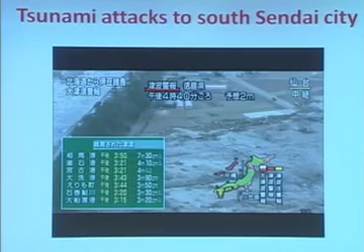Big ships also went onto the land. Very difficult to bring back to sea. This is very heavy when there is no water.

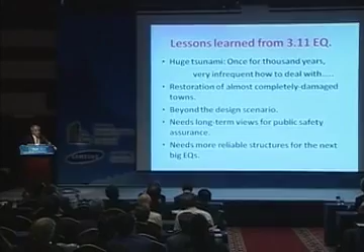Lessons learned from the March 11 earthquake: a huge tsunami occurring once for 1,000 years, very infrequent, how to deal with. Restoration of almost completely damaged towns - there are 500 towns that were damaged. Beyond the design scenario, we need to consider long-term views for public safety assurance, and need more reliable structures for the next big earthquake.

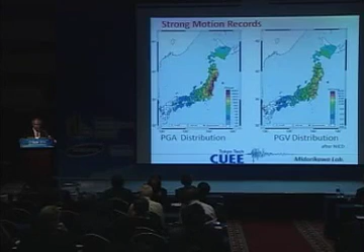Not only earthquake, but also strong wind we have to consider when we want to build very tall buildings in the world. On the left-hand side, peak ground acceleration distribution - maximum acceleration is 2.7 g. The maximum peak ground velocity displacement distribution, maximum is 3 meters per second. There are many earthquake records in these 20 years. Northridge earthquake, 17 years ago, top left.

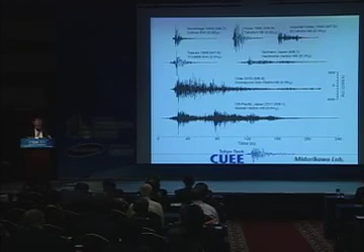The response spectrum I showed in Sendai - almost this level is once in 500 years response. But more than 1 second, not so strong. The less than 1 second period is a little big, so many buildings could survive. If the spectrum over 1 second until 3 or 4 seconds is like a peak of 1 second, I think many buildings would have collapsed.

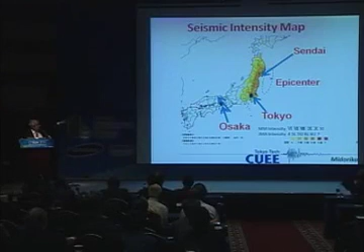I'd like to discuss 3 cities. Sendai is very close to the epicenter. Next, I would like to discuss several buildings around Tokyo. Finally, I'd like to show one building in Osaka. From Osaka to the epicenter, I think it's 800 to 1,000 kilometers distance.

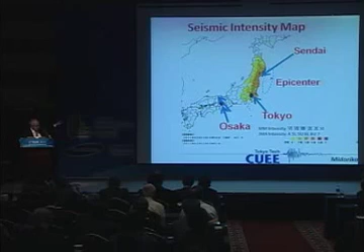This is Sendai city after the earthquake. I think you cannot see any damage. But we found permanent displacement in an apartment building. This is 14-story, not a tall building, but the residual permanent displacement is quite large. No one wants to live in this building after the earthquake.

They will demolish this building. I think you cannot understand why, but the permanent displacement - they don't want to live there after the earthquake. You can see the damage is not to structural members, but there is permanent displacement.

And about these 30 years, Japanese contractors, researchers and designers made retrofits to old buildings. This building was retrofitted before the earthquake, so this is okay, no damage.

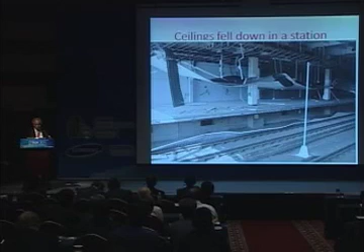This is a ceiling that fell down at the Sendai Shinkansen station, but no one was hurt. This earthquake was very long.

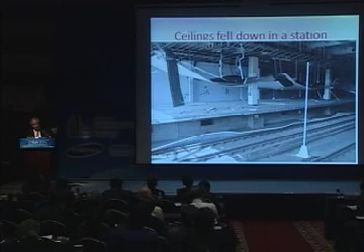They left from the dangerous ceiling, so it is okay. But more than 1,000, very many ceilings fell down due to the earthquake motion.

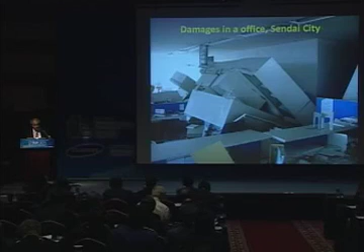And I would like to explain the behavior of tall buildings in downtown Tokyo. 35 million people live in the Tokyo metropolitan area, but we will have a big earthquake in the next 30 years.

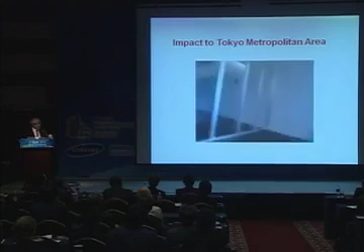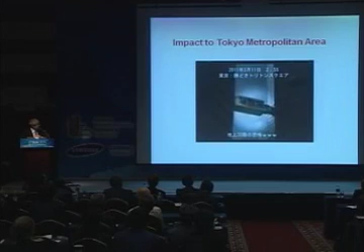This is a video inside a tall building. This is about a 40-story building, two 40-story buildings connected by a damper. I think you can see the movement of the connection.

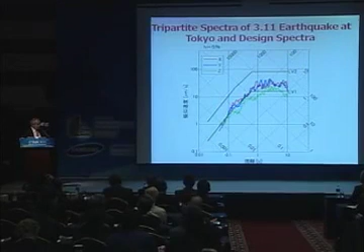We have two levels when we design tall buildings and ordinary buildings, level 1 and level 2. Level 1 is a return period of about 20 years. Level 2, we consider a 500 year return period. This tripartite response spectrum is between level 1 and level 2. Level 2 is 5 times bigger than level 1.

And we expect in design the level 2 earthquake. This level 2 is 3 times stronger than the March 11 earthquake.

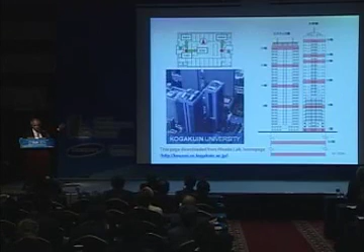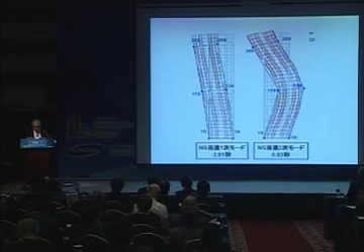This is Kogakuin University, but there is no damper and no seismic isolation. About a 30-story building. On the left-hand side, the first natural period and mode. On the right-hand side, the second mode and second natural period, 0.93 seconds. And from left to right, over 400 seconds, but vibration did not stop.

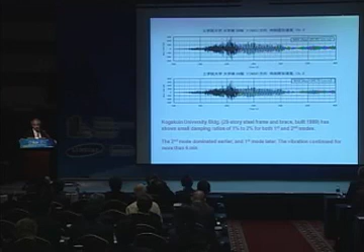More than 8 minutes, the vibration continued moving. And there is no artificial damping system. The vibration could not stop for more than 8 minutes. And the second mode vibration is also very large.

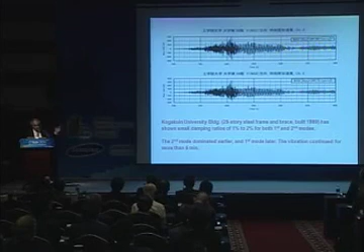And the second building - this building was originally designed and constructed more than 34 years ago. But 2 years ago, they put in oil dampers. But this building originally has a passive control system.

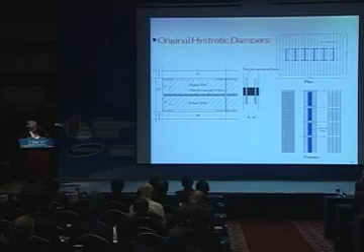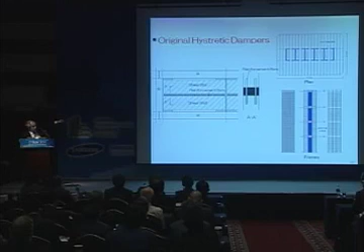You can see floor to floor, two shear walls, but the middle part has no concrete. There are many reinforcement bars - elastoplastic behavior they expect, and this is some kind of damping system.

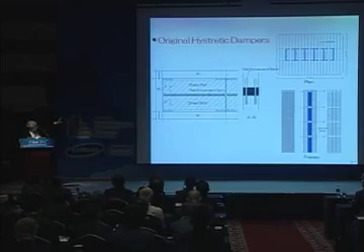More than 33 years ago design, a very new design at that time. But young engineers discussed and studied the behavior of this building under long natural period and long duration earthquakes. This passive damping system is not enough for a big, long earthquake.

So they decided to add oil dampers. They added them from the 15th story to the 39th story.

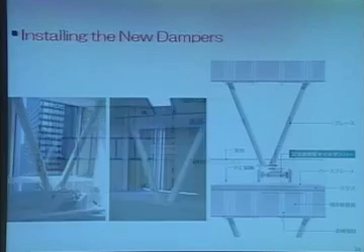This is a very new damper, a very stiff brace and oil damper. I think it's a very simple idea, I think.

But during construction, the workers and engineers are staying here. They developed a new construction system. They put these devices in using post-tension by the rod.

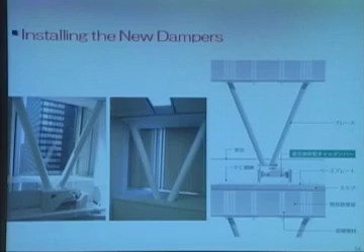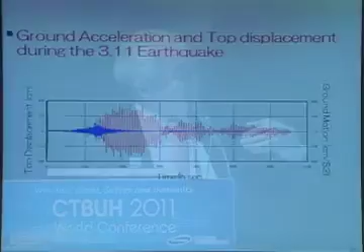But when I was a young engineer, I stopped the calculation after the big acceleration. I stopped the analysis. But we can recognize the maximum displacement will occur after the maximum acceleration. But the El Centro or Taft, very old earthquake records, do not have high fidelity, so we cannot do analysis for long natural periods using very old acceleration records.

Now we have new technologies. We can study these behaviors. And left hand side east and west, right hand side north south. And the earthquake that happened March 11 is green. But we consider the black dot line, about 2 or 3 times bigger.

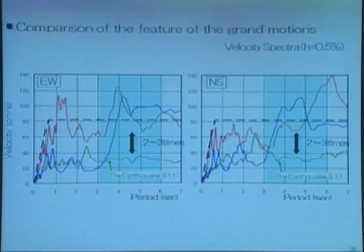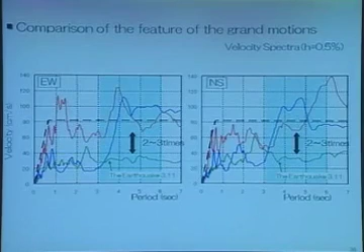And the maximum displacement at the top of the building, this building is 55 story, is more than 50 centimeters, plus minus 50 centimeters. And the total amplitude is more than 1 meter. But we consider a 3 times earthquake. If a big earthquake like this design level 2 earthquake comes in future, the top of the building will move 1.5 meters, 1.5 meters, total 3 meters. I think they cannot stay in the top of the building.

You want to make a tall building more than 100 story or sometimes 200 story. If you make these very high story buildings in Tokyo, I think they cannot stay at the 800 meter floors. Please don't forget.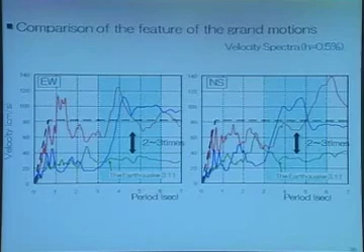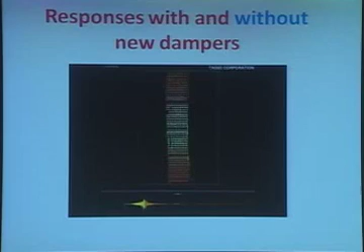This is analysis by Taisei Corporation, and their office is in this building. The first 60 seconds, the vibration is almost like the second mode motion. But finally, this building moves in the first mode. And the maximum displacement when they have no additional dampers is 20 or 30% more vibration, I think 80 centimeters plus minus. But they added additional dampers last year. The maximum displacement is plus minus 50 centimeters. But this is very large.

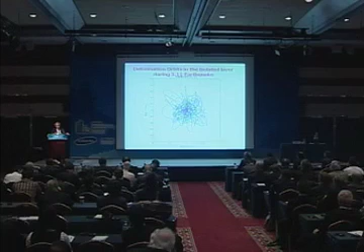And finally, I'd like to explain the seismic isolated tall buildings. Total natural period is 4.7 seconds, and the building height is 134. This is the orbit of the basement, plus minus 80 millimeters, not so large, but the structure's interstory displacement is less than 1 over 1,000. Very good performance they can get.

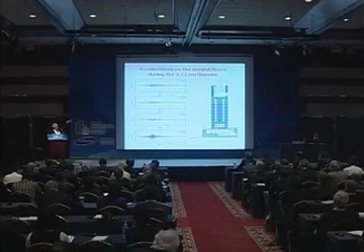The bottom is acceleration at the ground, but the top 3 acceleration records are inside the building. The acceleration in the building is smaller than the ground motion. If there is no seismic isolation system, the vibration of the superstructure is bigger than the ground motion. And this is not so tall a building, but very good performance is recorded. This is a design by Takenaka Corporation.

They measure many accelerations in not only the superstructure but also the basement and 50 meters deep in the soil. There is a seismic isolated layer, a very effective system, you can understand. The acceleration in the building is about 60 Gal, but ground acceleration is more than 150.

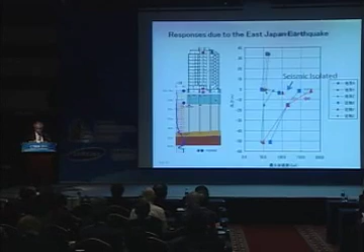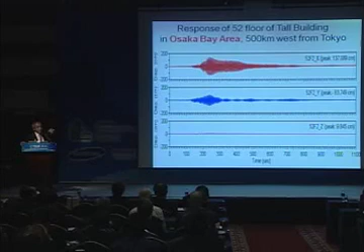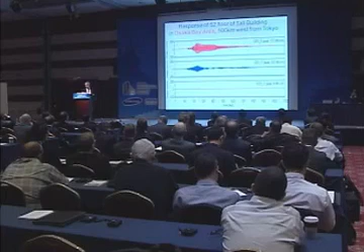And finally, I would like to show the tall buildings in Osaka, about 500 kilometers west from Tokyo. The maximum displacement at the top floor is 137 centimeters. I think you cannot believe. 500 kilometers west. This is 800 kilometers from the epicenter. But the displacement at the top is more than 1 meter. Plus minus 137 centimeters. This is a very serious problem now. They are studying how to reduce this displacement.

And the passive control structures, not only the dampers, but also seismic isolation. There are more than, I think, 3,000 or 4,000 buildings already seismic isolated or passive controlled. And we measured many records, and we have to understand the true capacity of the structure in preparation against a stronger shake that will definitely happen in these 20 or 30 years.

And just before I came here, I climbed up the Tokyo Sky Tree. The total height is 634 meters. I took the photo from 450 meters high. This is a TV tower, but we would like to make a building taller than 300 meters, or 1 kilometer, in Tokyo, like your project.